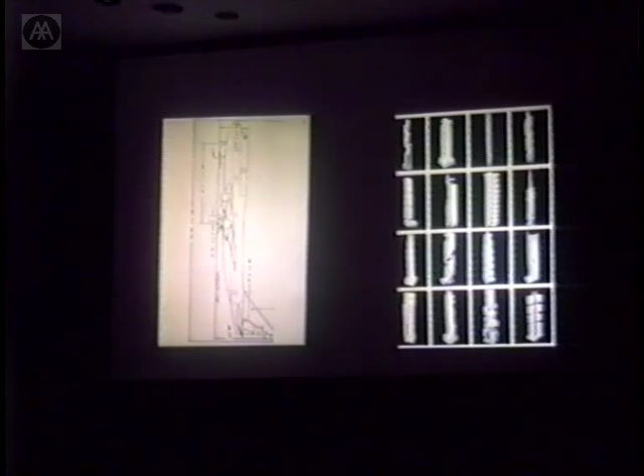And we conclude that a skyscraper, like it or not, is an international piece of machinery that every country in the world has. Even the poorest country in the world, Bangladesh, has skyscrapers. But similar to the 747 or the airplane, the 747 is like a sort of 20-story building, and it's made of bits and parts taken from all over the world. But every country in the world has a fleet of 747s. Even Bangladesh has its own fleet of 747s.

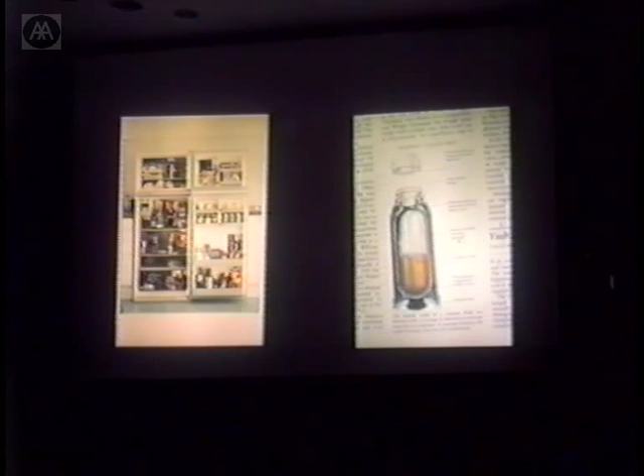Now, of course, the analogy is perhaps, in building in the tropics, like an umbrella sort of architecture, where the umbrella is probably one of the best analogies we have for architecture in the tropics, where it gives shading from the sun, keeps out a bit of the rain, and yet lets the wind through. And so we started to look at different categories of spaces, if you like.

Then we started to look at other analogies, and we found that ants build skyscrapers too. In fact, ants are much better engineers than we are, because ants build skyscrapers over 1,000 times their own height, whereas we build skyscrapers only maybe about maximum 300 times our own height, maybe 400 times. But the other thing I noticed is that ants build skyscrapers in relation to the climate of the place.

Now these are two ant hills in two different climatic locations. So ants already know how to use sun shading, steep roofs, and we are just beginning to learn how to do it in our architecture.

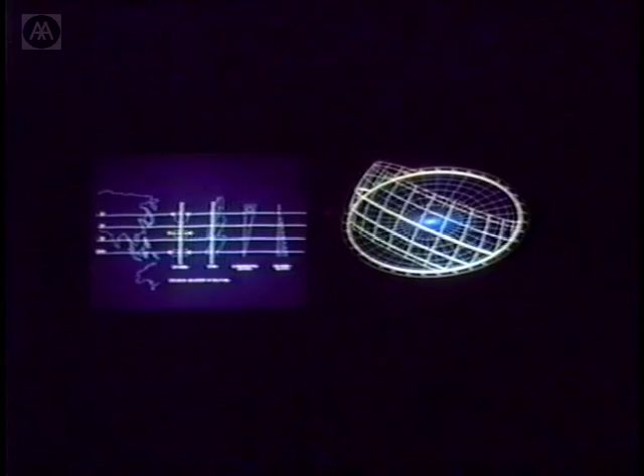These are some solar diagrams that I did with John Frazer's students about 2 years ago, where they started to develop a computer model for me, for looking at the sun shading and sun paths in different parts of the world. This is Kuala Lumpur. The sun's almost overhead. Well, this is near Singapore actually. Kuala Lumpur is here. It's about 2.5 degrees above the equator. That's Singapore.

Now, one of the major justifications of climatic design is really energy conservation. And so our proposition is that you're able to use building configuration through design rather than through mechanical devices to design a low energy building. But of course, low energy buildings are also a cultural lifestyle issue. And you can see that the richer the country, the higher the energy consumption. So you can lower energy consumption to a certain extent through building design, but essentially it's lifestyle which is the major way of saving energy.

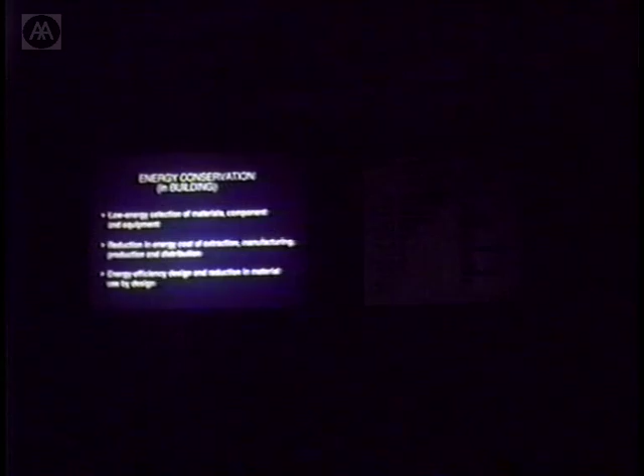There are, if you like, three basic strategies, I believe, in designing low energy buildings. The first one is through low energy selection of materials, components, and equipment. The second method is to look at the entire cycle of energy use, from extraction, manufacturing, production, distribution. The third is through energy efficient design, reduction of material use by design. At this stage, most of our work is really in this category. Hopefully, within the next 10 years, we'll cover the other two.

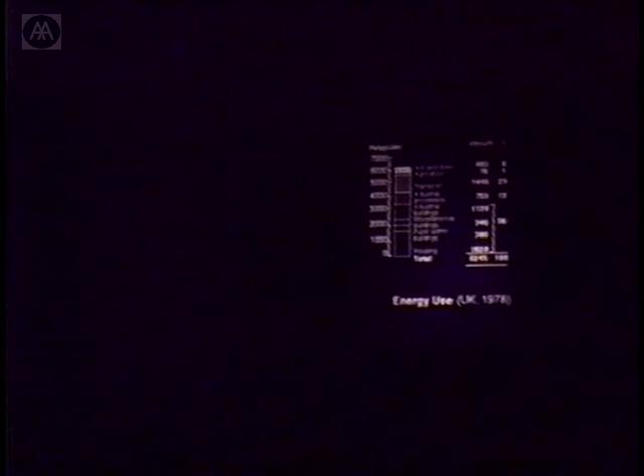But if you look into the way energy is used in the country, in the UK 56% of energy use is in buildings. So architects actually have an enormous say, enormous power in saving energy. And if you look into the life cycle of a building, the majority of the energy used is over 65%. And so if your building is designed to conserve energy by building configuration alone,

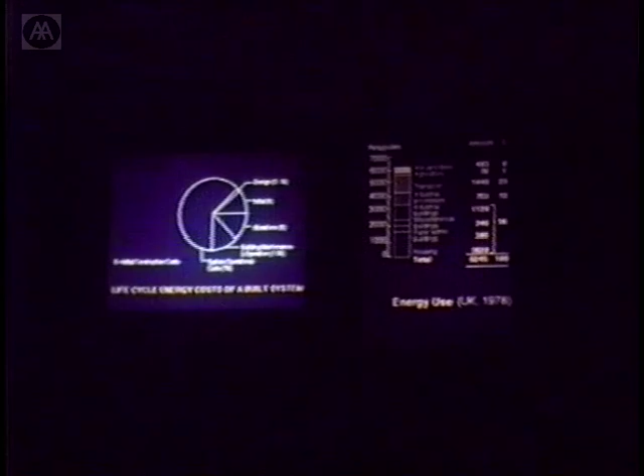every kilowatt of energy that you conserve contributes to reduction of the environmental impact of the entire cycle of getting that kilowatt of energy: production, transmission, and utilization of the kilowatt of energy. So every little bit helps towards the environment.

Now, when we look at tall buildings, one of the most important starting points was... this is a project that we are doing in Ho Chi Minh City.

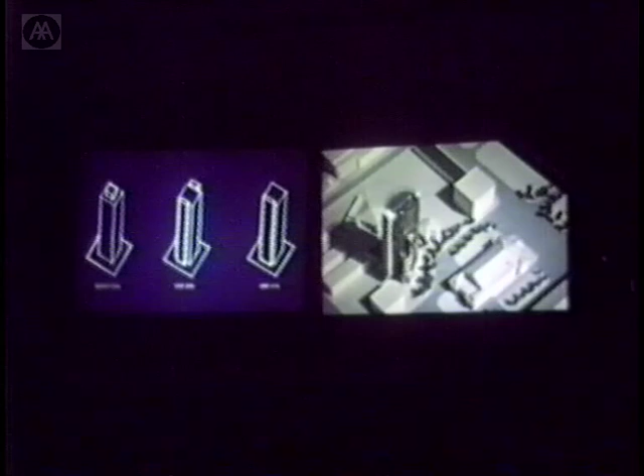And what we've done here is locate the cores on the hot sides of the building. By locating the cores on the east and the west sides of the building, we can actually reduce the energy consumption by the electrical of the air conditioning by at least 20–25%, because these act as buffers between the inside and the outside of the building.

Now, of course, by locating the cores on the hot side of the building, on the outside of the building, we create a low energy building through elimination of the need to pressurize the lift shaft and the staircases. If you have the cores in the middle of the building, then you have to pressurize the lift lobbies, pressurize the lift shaft, and so it has an added capital cost as well as an added operational cost.

By locating them on the outside, you don't have to pressurize the lift shafts, and so that reduces the energy cost. But at the same time, you have greater awareness of place. So, for instance, if you're on the outside of the building, as soon as you get out of the lift, you can see out. So you get natural ventilation, natural sunlight, but you know where you are.

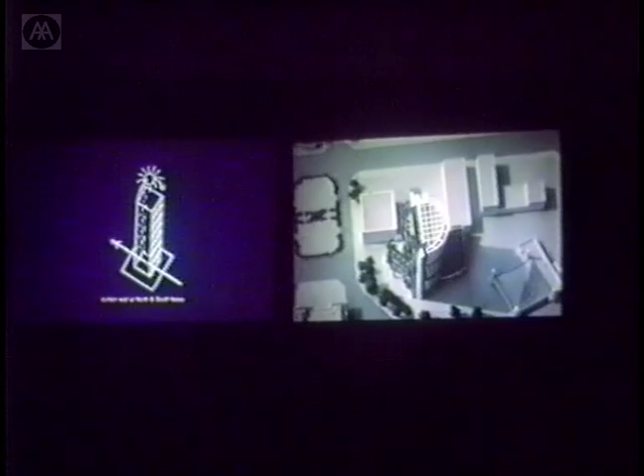So for instance, when there was a power failure, or when they had a bomb in the World Trade Center, and the cores in the World Trade Center were in the middle of the building, everything failed. The electrical system failed, the emergency supply failed, and people couldn't find the staircase. People couldn't get down the staircase. And the person who led the people down the staircase did it through his Indiglo watch, which took them down the staircase.

The other thing we conclude in trying to design a high quality low energy building is that the curtain wall should be located in the positions that have the minimum solar insolation. So for instance, in this building, we located them on the north sides and the south sides of the building. But in this way, you could also tell the geography of the place by looking at the building. So when you look at this building, if you're drunk, that's where the curtain wall is. That's north, and that should point the way home.

Of course, the other thing is space making, because a tall building has a danger to become just a concrete tray in the air. So we thought, well, let's try and do something else to make them aware of the environment and to give them greater choice between the inside and the outside. That was the building that you saw earlier on. Sorry, this is in Kuala Lumpur.

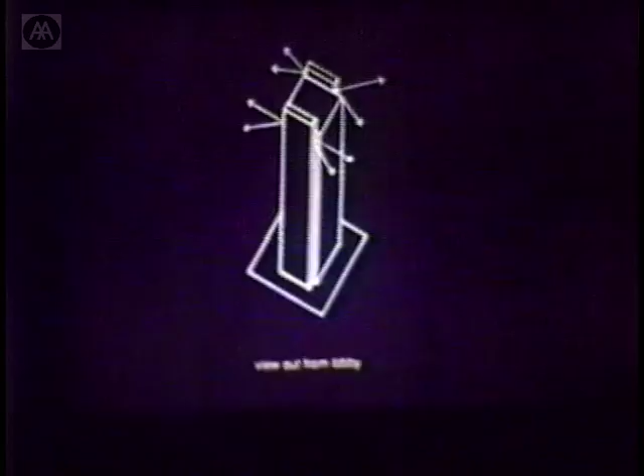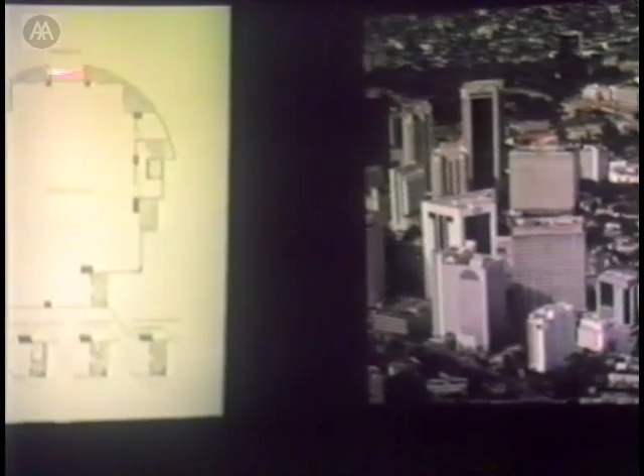And so, if you have the cores on the outside, then you can look out and you can see where you are. And by also creating terraces on the outsides of the building, we're able to give a transitional space between the inside and the outside, so that people on the inside of the building have a choice to go out. And so in these terraces, we also located planter boxes so that we could green the building and put plants on it so that it comes alive.

But if you look into the plan, the principles suddenly started to emerge for us anyway, because we did this almost unconsciously. The cores are put on the east side and the west side, hot sides of the building. So this is the service stair and the service lift. This is the main lifts and the staircase and the toilets. All these have natural ventilation and sunlight. And then when you get out of the lift, you can see out so you know where you are.

And then on the hot sides, we located terraces so that people go out to these terraces. And then on the north face and south face, we face curtain wall. But what we found is that by locating the terraces on the corners, we were able to have full height sliding doors, because generally for high-rise buildings, we never use sliding window sections because of the bad water exclusion. We always have to use casement windows. But because the windows were recessed, we were able to use sliding doors.

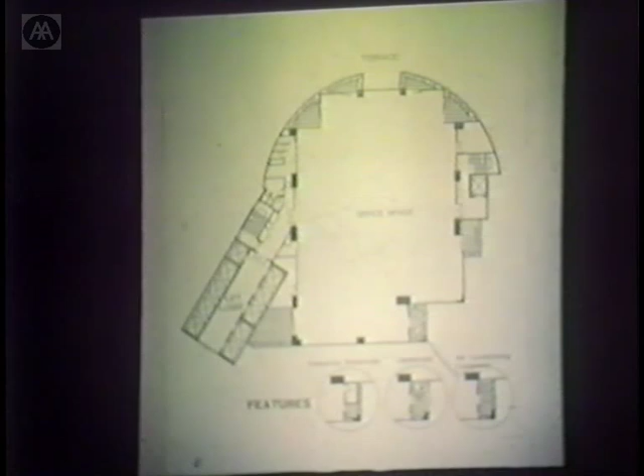And that means when the air conditioning failed, they could adjust the natural ventilation entering the building through adjusting the doors. And the planter boxes, we had sprinklers which fed water, gravity-fed water, as well as fertilizers into planter boxes, so that the building became almost like a living organism.

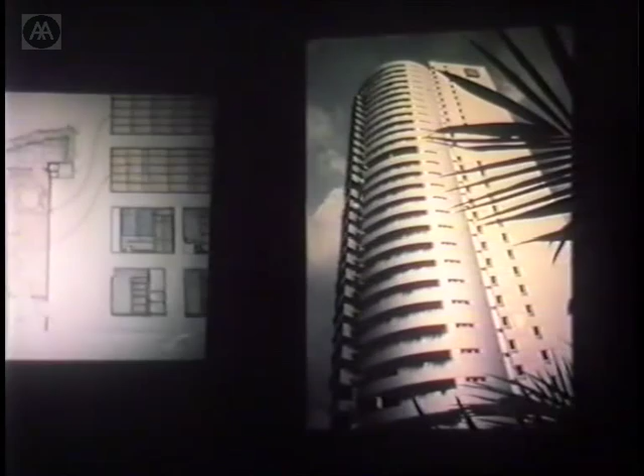And this is one of the executive offices at the corner, and this is where one of those terraces are. Then we started to look and say, well, that's a great idea, cutting notches in the building. So we started looking into cutting big holes and creating places in the sky, or sky courts.

So this is what we did with this project in Penang. We started to cut some holes into the upper parts of the building so that increases the places in the sky, increases the communal spaces, as well as the cross ventilation through the building. The building was completed last year, and those were the voids cut through the building.

And that's a wish model, showing how we would like the plantings to be grown all the way down the front of the building. Hasn't grown yet, but I hope it will. These are the terraces that you see here going out into the...

To give an example of the pace we're working, we were given 1 month to do a complete set of 1 to 100 building plans for this project. I couldn't finish in a month. I took about 5 weeks. I nearly got fired from the job. But having done the building plans, the building was under construction, the internal staircase took me 3 months to design. It was a steel staircase.

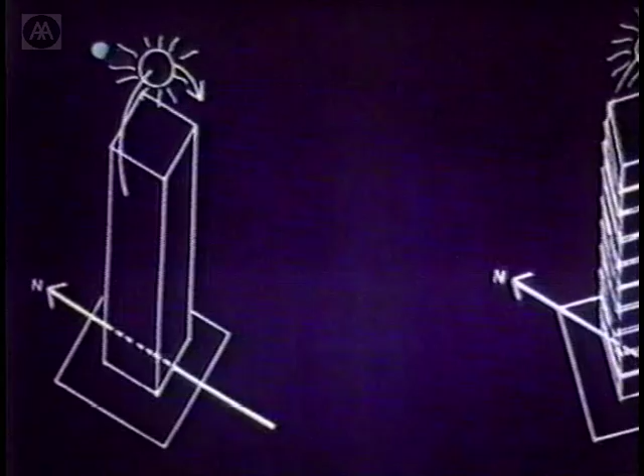So, can you imagine that we spend more time detailing a staircase in the building than building the building itself, because we had to get the building plans approved. Otherwise, they couldn't sell the apartments, and all sorts of marketing problems associated with that.

Then we found that ideally, and you have to remember, for most commercial buildings we're working on very tight and small sites, if the geometry of the site and the geometry of the sun coincides, that's fine, because then you can just put a regular building on the site. What happens if it doesn't? So then you have to correct it.

So with this building, we had to put more sun shading on this corner and on the other corner to compensate for it. So for instance, north is up that way, and the site is this shape. So if the building is rectangular in shape, then all 4 faces of the building get solar insolation. So in this way, we actually justify the shape of the building.

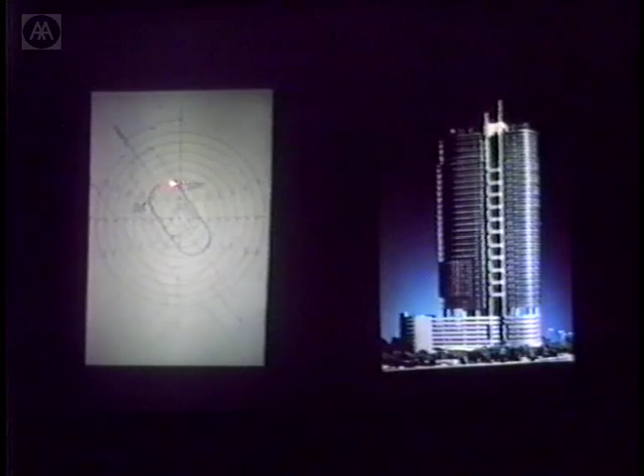Having a curved wall here, because parts of the building facing exactly north and south will not get that much direct solar insolation. And this is a 2-zone building. So the first zone lifts up to here. Then we reclaimed the office floor and shifted the toilets over here, so that the efficiency of the upper floors will be better than the lower floors.

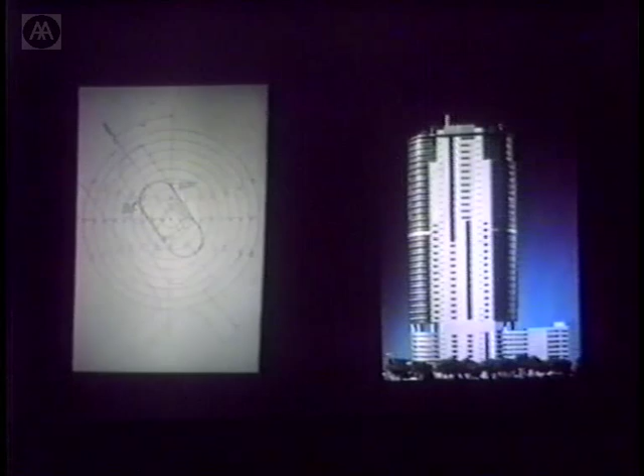Of course, there'll be situations where the longest side of the site faces the hot sides, and so we have to shade almost the entire face of the building. This model was made by one of John's students, I think. John says...

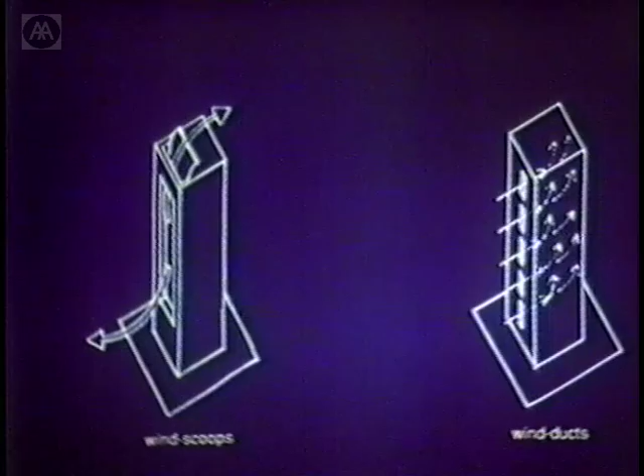The other thing we try to do is we thought, well, why don't we have a wind scoop to try and bring wind into the upper parts of the building. So these are 2 propositions. One is to have a single large wind scoop, and the other is to have orifices in the building so we can get wind into the inner parts of the building. Wind speeds at the upper parts of the building can get as high as 42 meters per second as maximum gust.

So this building was completed in 1985. So we try to have this big hole cut in on the outside of the building, to try and get the wind through, like this scoop. And that's looking up, and to let hot air out, we have to do this at the top. And where the glass faces the inside of the building,

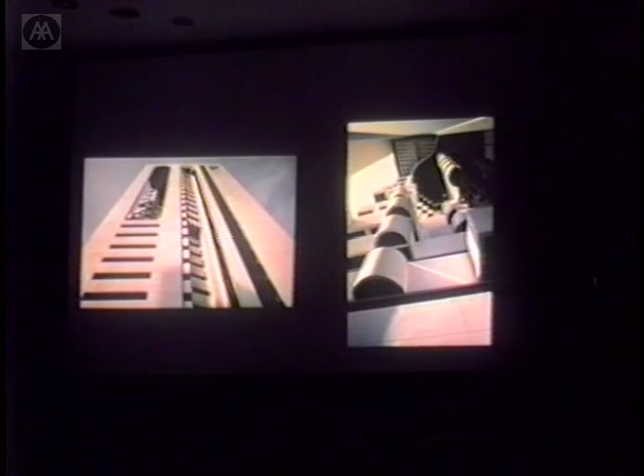we are cutting more. And then we have terraces to try and make life in the upper parts of the building more than just a concrete tray, and to give variety and visual contact between the people in the upper parts of the building and the lower parts. At that time, we were still using masonry in most of our projects, and so this was 1985, designed in 1979.

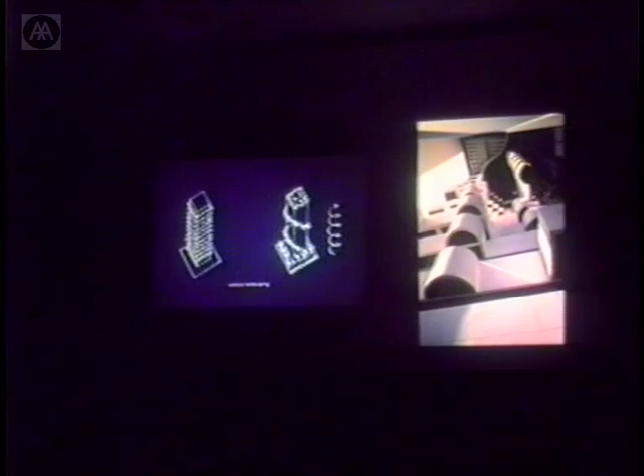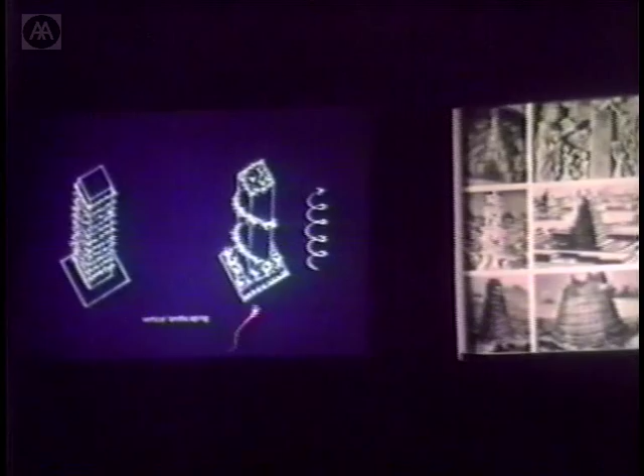Then I had a conversation around 1986 with Kurokawa, and I said what I wanted to do was to bring planting up the building. So he suggested, well, why don't you look at the Tower of Babel? So I said, right, the Tower of Babel is really spirally going up, so that's a great idea. Because ecologically it's much better to have continuous planting if you can, because that encourages species interaction, rather than having planting quarantined from each other. So we thought, well, why don't we have trellises climbing up?

Because planting climbs up very easily through the trellises. And so we thought we'd have planting starting from the ground, creeping up the sides of the building, crossing in between, and going up the other side of the building. So that's what we did with this project. The first building done by Yeang, where we got the planting up as high as we could, up across the floor, and then it goes up again on the other side.

And here's the detail of the planting at the corner, or the lower corner. This is where the planting turns around the corner, goes up again. And the sun shading has much more changes in depth. This building was completed in 1986. You can see the plantings are coming out here, going across, and then at the other side of the building it comes up again. We wanted to put more planting in, but we couldn't convince the client to do that. So this was as much as we could.

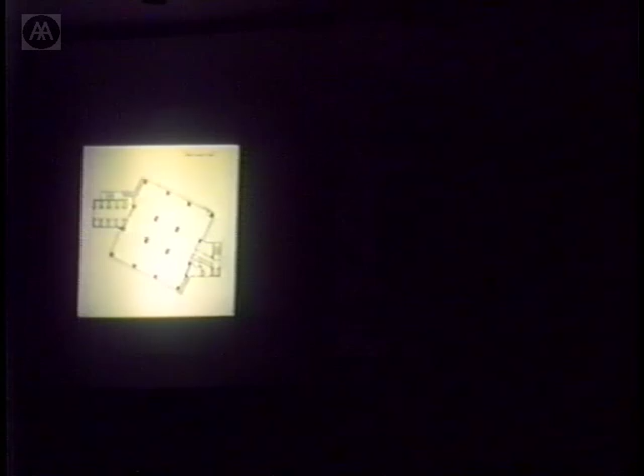Here's the floor plan. You can see the floors on the hot side again. And the floors will twist out as it goes. They'll twist out here, on this side, and twist out here. So you can see how the floors will shape in the other parts of the building. And then this is the shape of the site, which is almost squarish. The typical floor is orientated north-south this way, so the floors are orientated here. Again, you have natural ventilation and sunlight to the staircases.

Then, with this project, which is now under construction, north is that way, so the logical position is on this side. But the client said, well, this is the main street. This is where I could sell. This is my best view. So we located all the cores on this side of the building, and we had to sort of recess the windows to give sun shading to the back of the building. It's under construction about to this floor, and we have one cross bracing for every 3 floors. This is a cigarette pack site, so thin and slim.

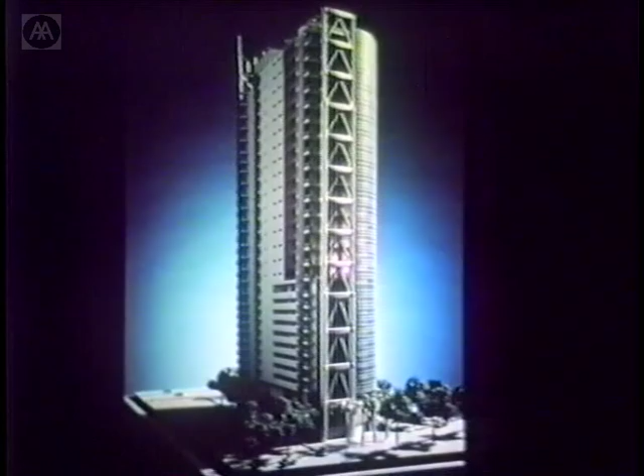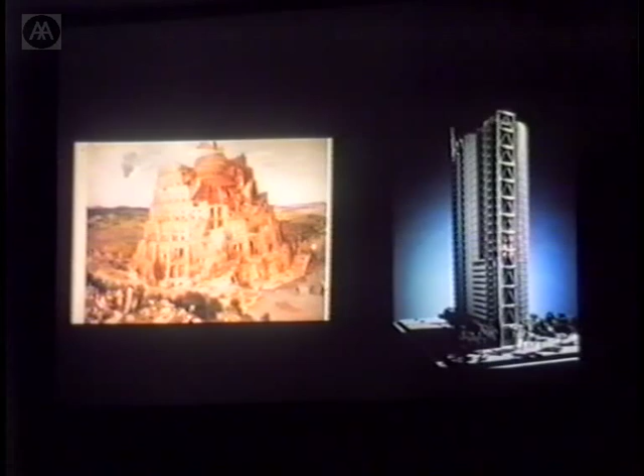So back to the Tower of Babel again. So we thought, well, let's really complete this idea of a circular building with spiraling planting. And that's when we did this building, finished in 1992. This time we wanted to mound the planting up the building. So we had a discussion with the landscape architect, and she said, well, about 36, 37 degrees would be about right. Anything more than that, the erosion, the tropical rain will just wash the turf and the planting away. So we mound up about 36, 37 degrees, put the lecture rooms here, and then the auditorium is here. And these are the office floors.

These two are the executive floors. That's the gymnasium, and the swimming pool, and the deck is on the top. That's the sunroom. That's the model of the building. So you can see the planting coming out from the sides of the building. And the building was designed in 1989 and completed in 1992. That's the completed building. So we had been fairly faithful to the model. You can see the terraces spiraling up.

But most of the time we have to try and sell the idea to the client. So when we did this design, we worked with a client who wanted a building which was initially 65,000 square foot that could expand eventually to about 85,000 square foot. So we said, well, there are a number of ways you could do this. One is to pile, to allow you to build extra floors later on. Or another way is to expand sideways. And in our discussion with him, he suggested, well, why don't we have interstitial spaces that we could fill up later on?

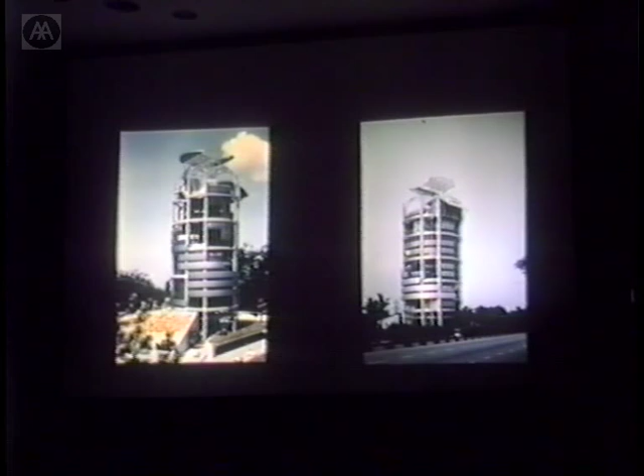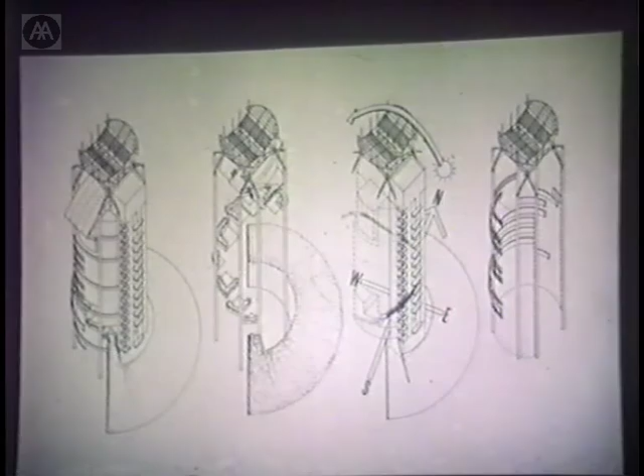We finished this in 1992, but this was the beginning of our second series, because in the first series we had individual buildings with individual ideas, and here we brought all these ideas into one single building. The idea of spiraling, of planting, and we had much larger terraces this time, and with sun shading. So you can see the planting coming out, and the terraces, and the sunroof.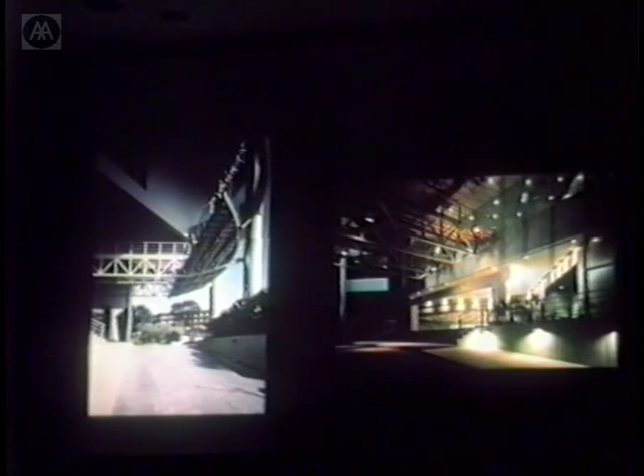This time we had much larger terraces than the other building. And so we had several sliding doors on both sides with greater control of natural ventilation into the inside of the building. And what we did was that we proposed that all the partition offices should be in the middle of the building rather than on the outside of the building. The first thing that anybody does, moving on the floor, is to put all the partitions on the outside of the building. I said, oh, that's terrible, because then the majority of the people, the clerks and secretaries who use workstations, never get access to a window.

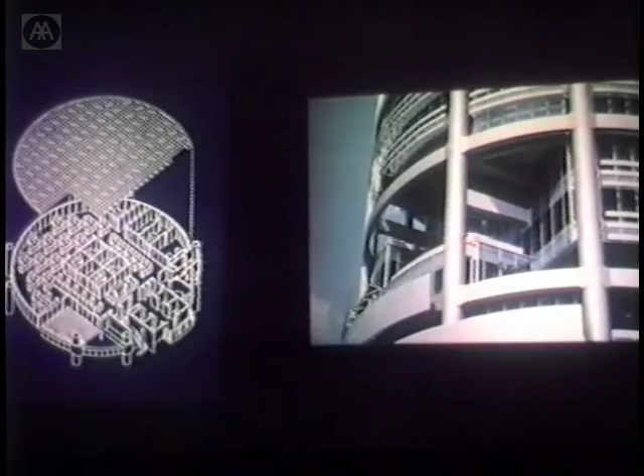So I thought, well, you should put all the executives in the middle and give them glass, full height glass, so they can see out and get sunlight anyway. And they're never in the rooms anyway. So I thought I'd put most of the people in the workstations on the outside. Of course, you could have some against the outside wall, but let most of the people have access to a window. And so this is the detail of the skyscraper. So every floor has a sort of 3-story atrium looking up, stepping up.

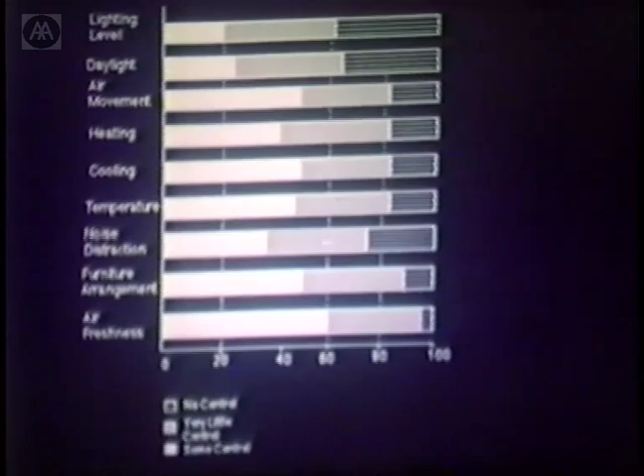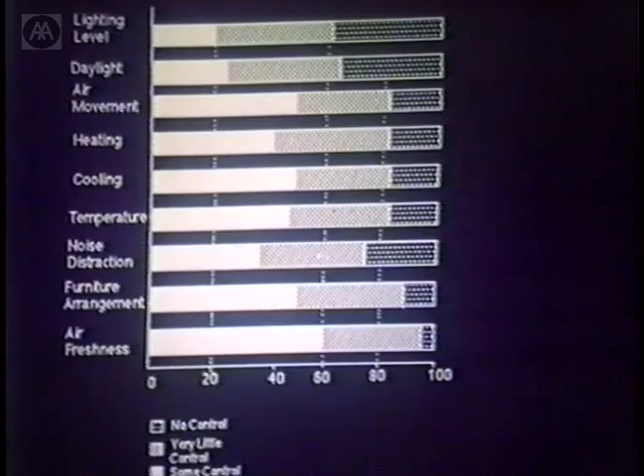And figures have shown that if you ask people what they would like to control in the internal environment, lighting level, daylight, air movement, heating, cooling, temperature, noise distraction, being able to move the furniture, or air freshness, an overwhelming 60% say they would like to control air freshness. Now, whether they actually open the window or not, get access to a window or not, 60% say for peace of mind, they would like to be able to control the air freshness in the building. And so in this sense, a naturally ventilated building is an indication of the way to go for the future of the tall building.

And this is how it looks from the inside, going out to the terraces, and this is the other side of the building. In case the air conditioning doesn't work, we have this with air conditioning.

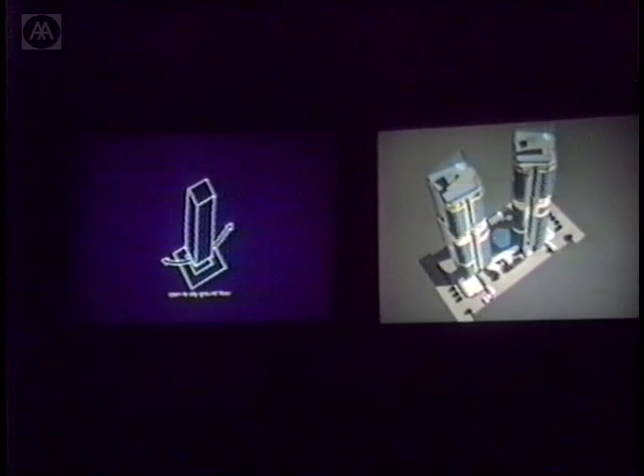Staircases encased, and we took out all the cladding from the escape stair, so it's cheap to build, and the escape stair is only used in emergencies anyway. And here's the detail of the sun shading, and this is the catwalk to clean the windows. The other proposition is to have open-to-the-sky space at the ground floor, so the transition from the outside into the inside of the building is gradual, so you don't just walk to the building and hit the glass wall, but you go into a sort of naturally ventilated lift lobby before you enter the building.

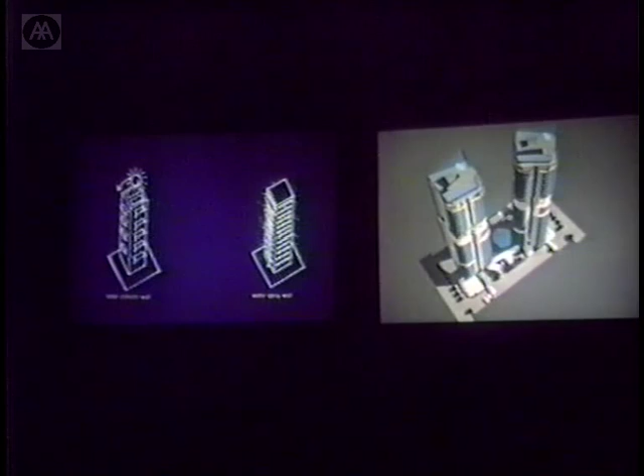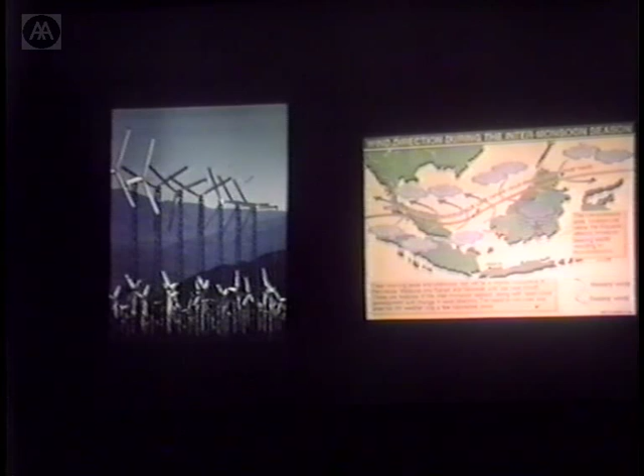This is a project that we are proposing in China. This is a building in Abu Dhabi. So we start to look at, from sun, we start to look at wind and see how we could use wind to ventilate and to create energy. This is the wind rose in Kuala Lumpur. Not very reliable wind data, but what it means is that you get wind about 38% of the time, mostly from the east.

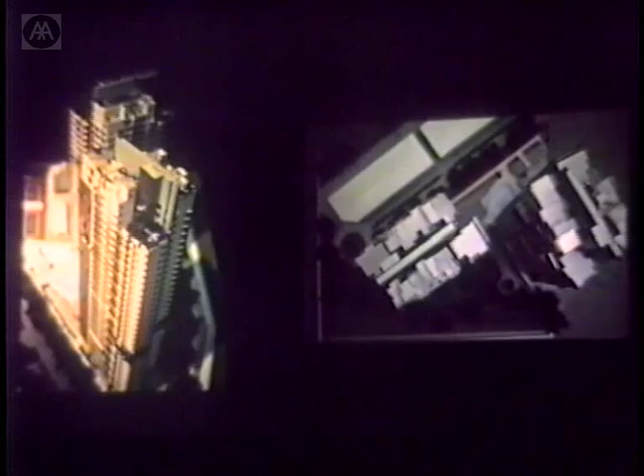With this project, what we did was to pull the apartments away from the corridors so that we had cross-flow ventilation on the insides and around the building, to try and create apartments which are almost like a detached house in the air, with bridges linking the apartments. So these were the wind studies done by Phil Jones at the University of Cardiff for us. So these were the apartment buildings, about 30 stories. And you can see that this is the corridor going all the way down. Cross ventilation through this side and through that side.

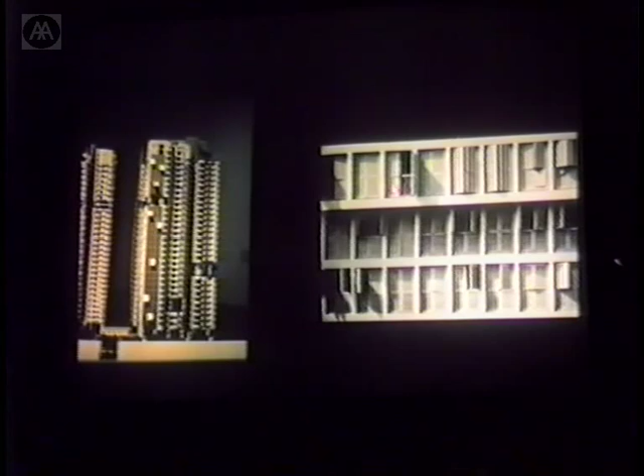I saw this in Singapore in one of the housing boards, and I thought it was a great idea. So you have louvered walls, so you can control. You have 3 levels of control. You have glass, you have balustrades, then you have louvers. So we thought we would put this on parts of the building.

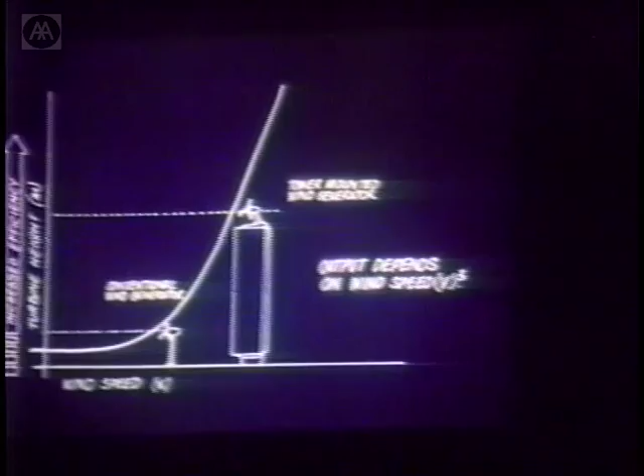Then we did this project in Haikau with Chris McCarthy. This drawing is actually done by Chris, and he suggested that wind speeds actually change as you go in the upper parts of the building, that you should actually have different systems at different heights of the building.

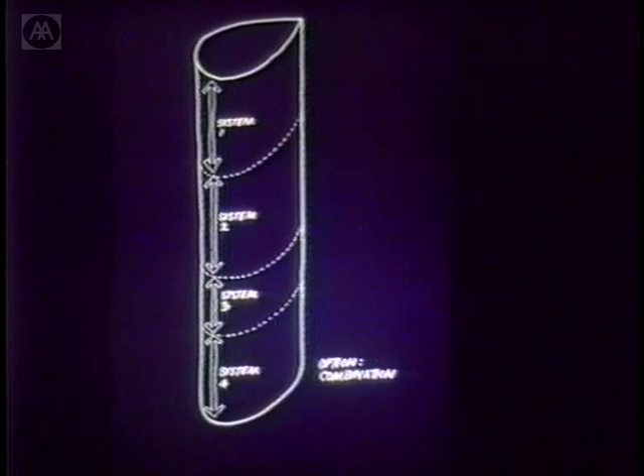For this building, it's an office building. You can see the hot sides are on this side, so we put the sun shading. Most of the wind comes from this side, which is northeast. And so Chris suggested we have 2 systems, one for the tenant areas and a separate system for the public areas, which is the lift lobbies.

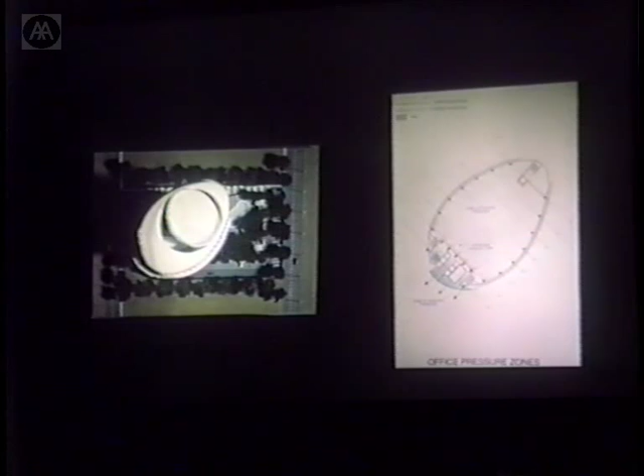This is where the lift doors are, staircases, and you can see that this again is a 2-zone lift system. The first zone lifts serve up to here, then we cleaned off the space, shift the toilets. And that's looking at the other side of the building. And this little scoop at the top to try and catch the wind, and that's a revolving restaurant. That's a detail of the transfer where we change.

Incidentally, I have a large number of AA graduates working for me. This is designed.

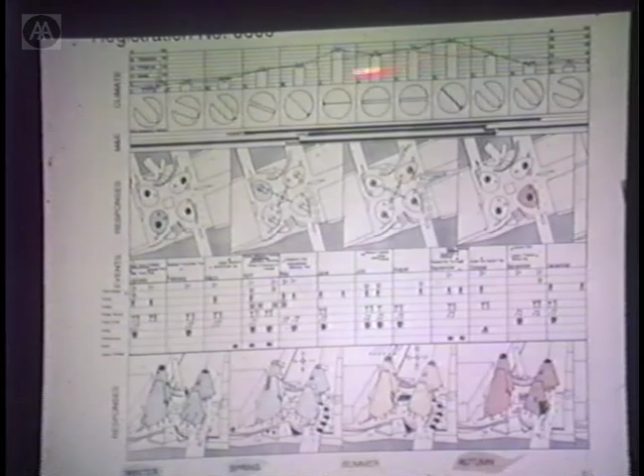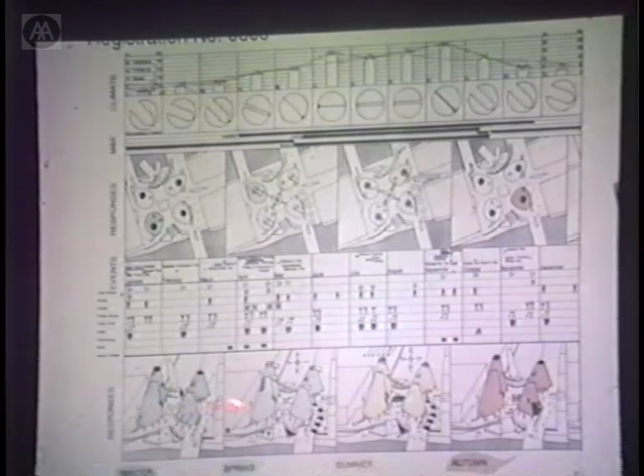Ideas that we did earlier on. We look at temperature, wind direction, and we also look at some different Japanese festivals and different activities, so that the cones take on different colors at different seasons of the year. Different things pop up and down, screens. The wind gets more intense at certain times of the year, so screens pop up to shield the plaza.

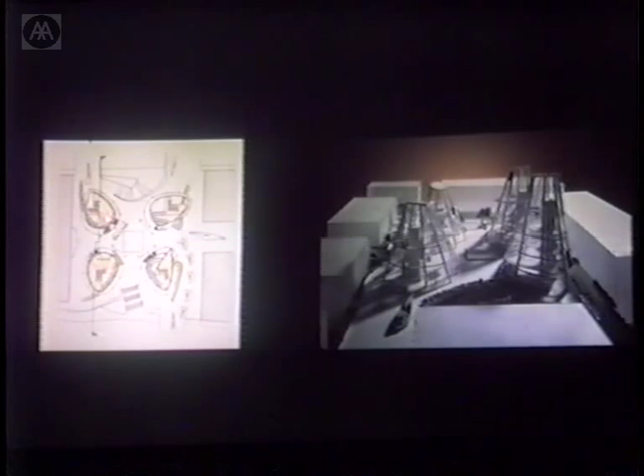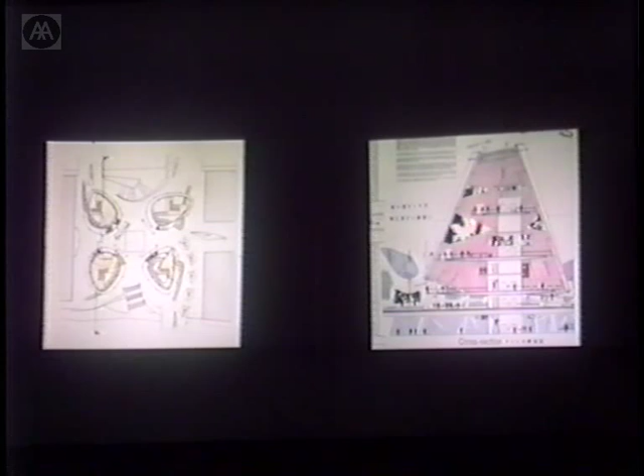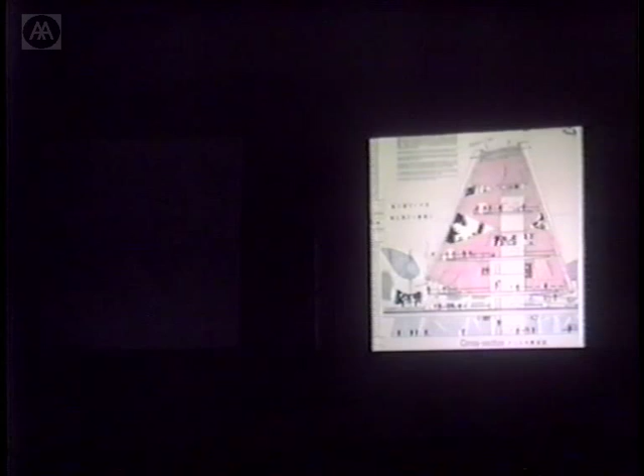The umbrellas start opening different times of the year, and tops of the cones get sealed up or open. And inside the cones we have levels which look out on the space. Also covered with fabric, so that we can have projections on the cones and see on the outside, and the umbrellas on the outside. That's spread out. This will conclude the basis of all our work.

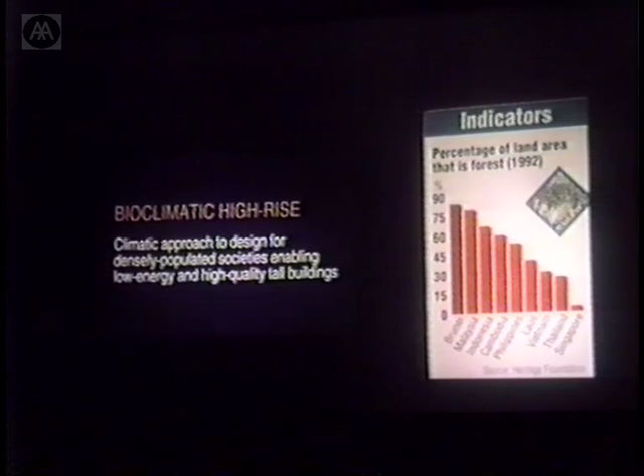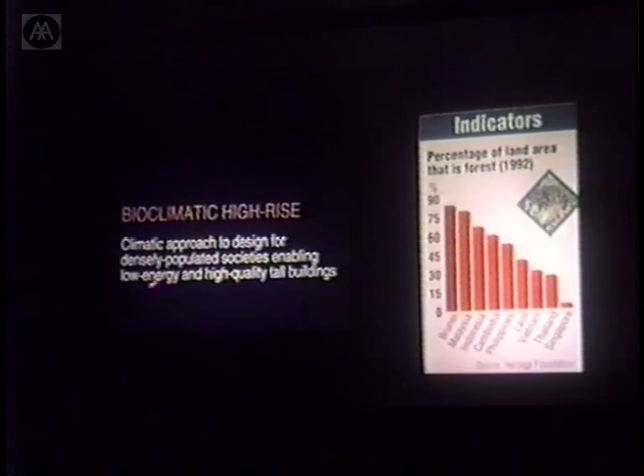So the bioclimatic high-rise at this stage, which is only part of our agenda for ecological tall building, is really a climatic approach to design, enabling low energy and high quality tall buildings. Big question.